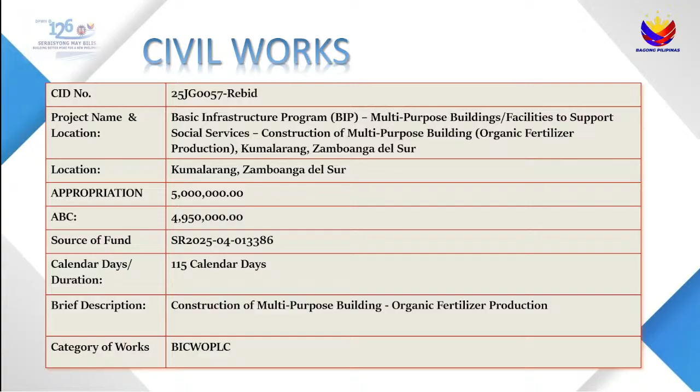Next, CID 25 JG0068, emergency project for reblocking of secondary roads, Dimataling-Tabina Road, Barangay Sumpot to Junction, Barangay Baganian section, road section ID 01168 MN. Station limit CH 1615.5 to CH 1660.5, length 90 meters, 20 blocks both lane, Tabina, Zamboanga del Sur, with ABC of 718,289 pesos and 25 centavos.

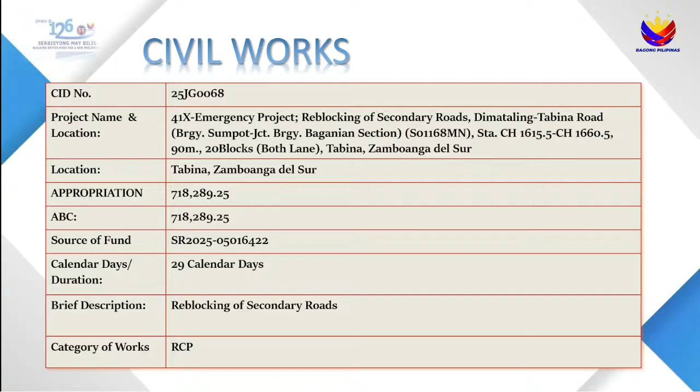Next, CID 25 JG0069, special maintenance project for reblocking of secondary roads, Dumalinao to San Pablo road, Junction Poblacion, Dumalinao to Rebokon section, road section ID 01101 MN. Station limit K1688 plus 714 to K1688 plus 738, total length 42 meters, 9 blocks and 1.5 meters both lane, Dumalinao, Zamboanga del Sur, with ABC of 476,229 pesos.

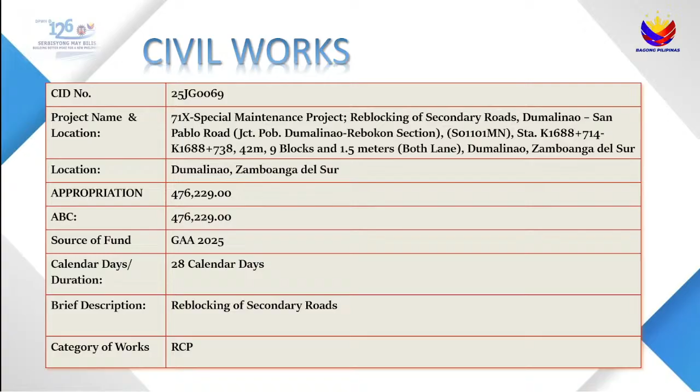And the last, CID 25 JG0071, construction of school health facilities, Kabatan National High School, Vincenzo Sagun, Zamboanga del Sur, with ABC of 3,469,580 pesos and 70 centavos. And that's all, Mr. Chair.

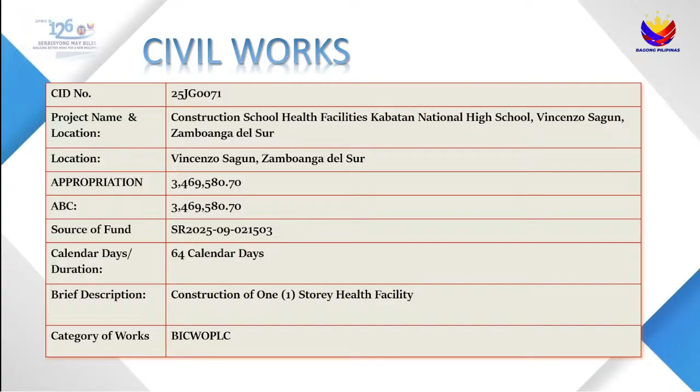Okay, thank you, Engineer Panong. Let's proceed to discuss, clarify, and explain the projects to be pre-bid today. First we will have the planning and design section, followed by the maintenance section. I call the chief of the planning and design section, Engineer Belemiba.

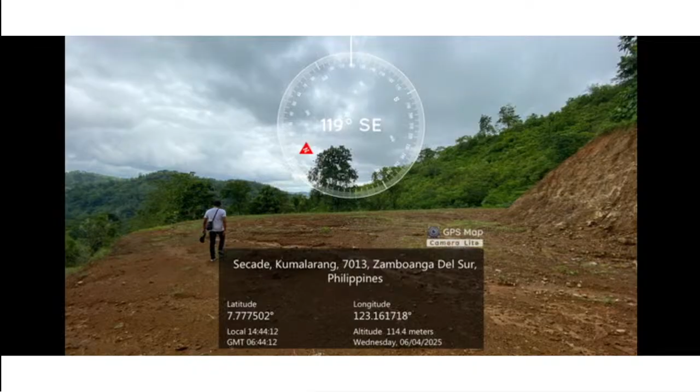Our process here will be presenting some of the plans and the site pictures, and then I will leave this to our preparer, the programmer, for the pay items involved in this project. Secretariat, ma'am, do we have any pictures and plans for 25 JG0057? So to our prospective bidders, this is the allocated site under Barangay Secade, Kumalarang. So ma'am, do we have any pictures now?

Okay, so for the information of our prospective bidders, we have an existing ongoing project from the LGU, this is the MRF project. And then ma'am, we have plans. Okay, so this is the revised plan. The allocation only fits the multi-purpose building only. So these are the plans.

Our advice to our prospective bidders: please coordinate with the planning and design section for the actual location of this project. If you have any concern about the pay items involved, you can coordinate with the planning and design section. Now, to present the following pay items and BOQs, I would like to give the table to Engineer Kathleen Villaveto.

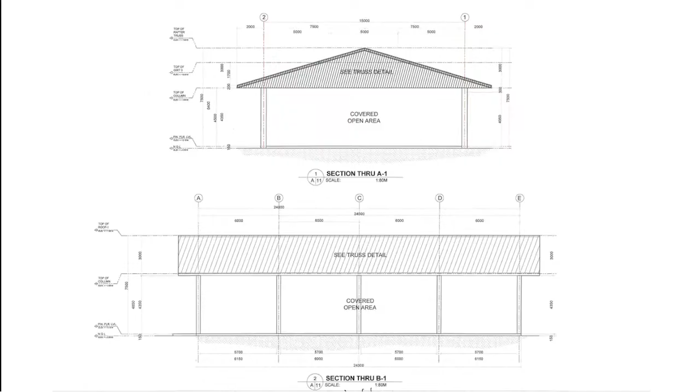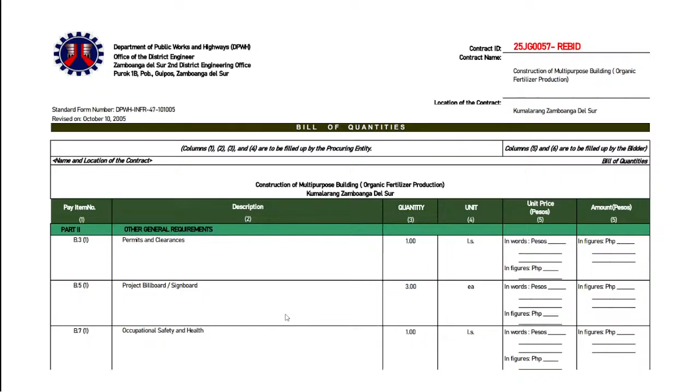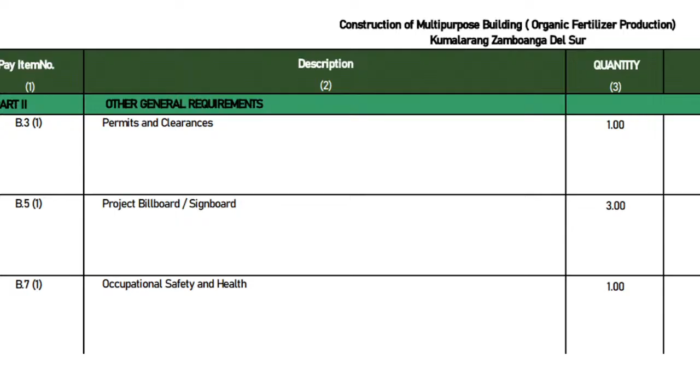Good morning to each and every one of us. For the project of construction of multi-purpose building, these are the bill of quantities per pay item. In part 2, other general requirements, you have permits and clearances, 1 lump sum; project billboard and signboard, 3 each; occupational safety and health, 1 lump sum.

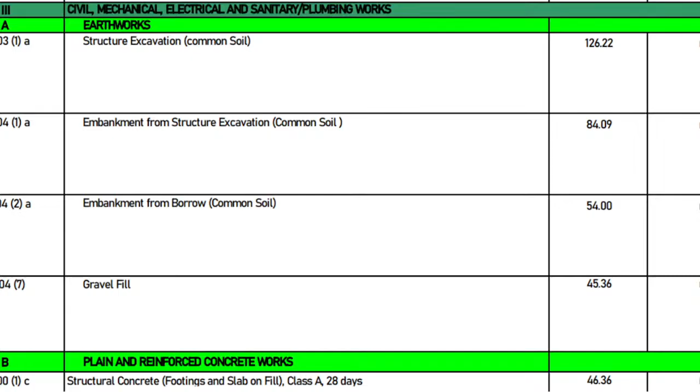Then for part 3, under civil, mechanical, electrical, and sanitary works, you have structures, part A, earthworks: structure excavation common soil, 126.22 cubic meters; embankment from structure excavation common soil, 84.09 cubic meters; embankment from borrow common soil, 54 cubic meters; gravel fill, 45.36 cubic meters.

Part B, plain and reinforced concrete works. Structural concrete footing slab on fill, Class A, 28 days, 46.36 cubic meters. Structural concrete for footing tie beam, Class A, 28 days, 8.64 cubic meters. Structural concrete columns, Class A, 28 days, 15.54 cubic meters.

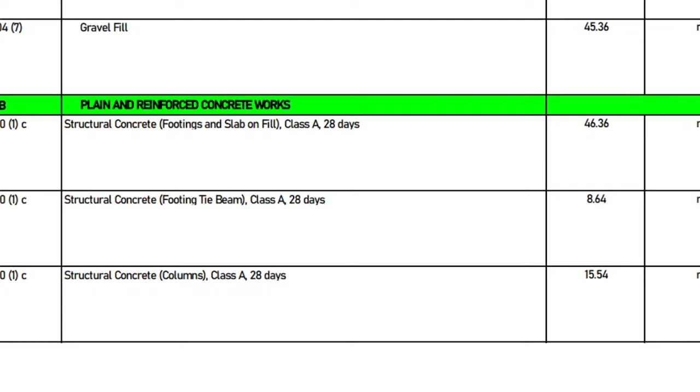Reinforcing steel, deformed grade 40, 2,068.68 kilograms. Reinforcing steel, deformed grade 60, 4,545.83 kilograms. Formworks and falseworks, 222.90 square meters. Part C, finishing and other civil works.

CHB non-load bearing, including reinforcing steel, 150 mm, 11.70 square meter. Finishing works, wall on metal frame, mini-rib, 42 square meter. Cement floor finish plain, 360 square meter. Cement plaster finish, 144.90 square meter.

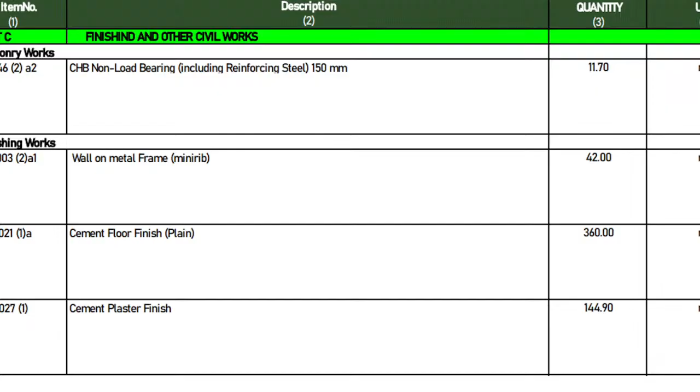For the painting works, painting masonry concrete, 121.50 square meter. Painting work steel, 688.46 square meter. Under the roof framing and roofing works, pre-painted metal sheets, corrugated long span, 560 square meter.

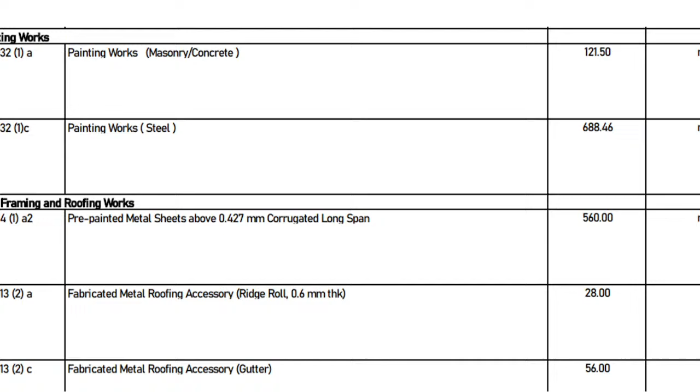Fabricated metal roofing accessory ridge roll, 28 meters. Fabricated metal roofing accessory gutter, 56 meters. Fabricated metal roofing accessory flashing, 40 meters.

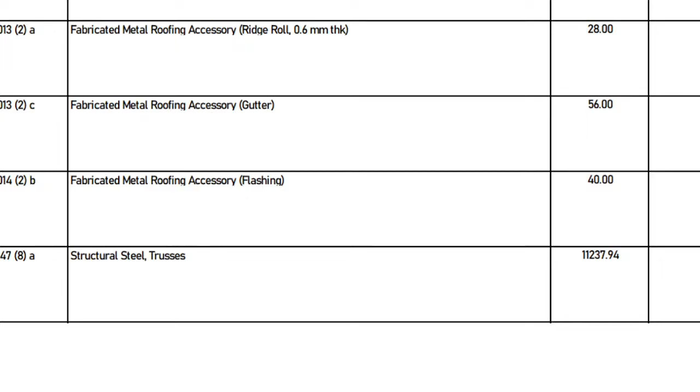Structural steel trusses, we have 11,237.94 kilograms. Structural steel purlins, 3,586.68 kilograms. Metal structure accessories, bolts and rods, 136.75 kilograms. Metal structure accessories, steel plates, 755 kilograms.

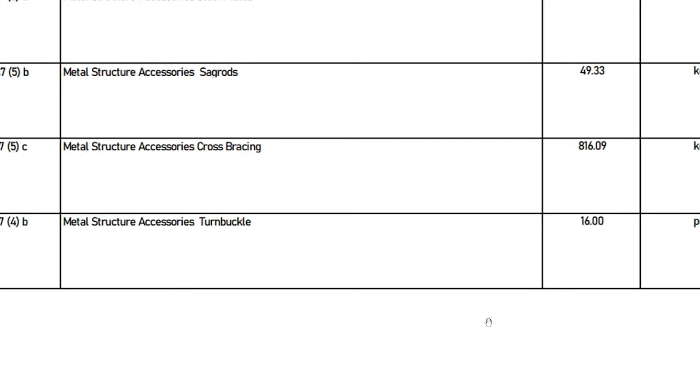Metal structure accessories, sag rods, 49.33 kilograms. Metal structure accessories, cross bracing, 816.09 kilograms. Metal structure accessories turnbuckle, we have 16 pieces.

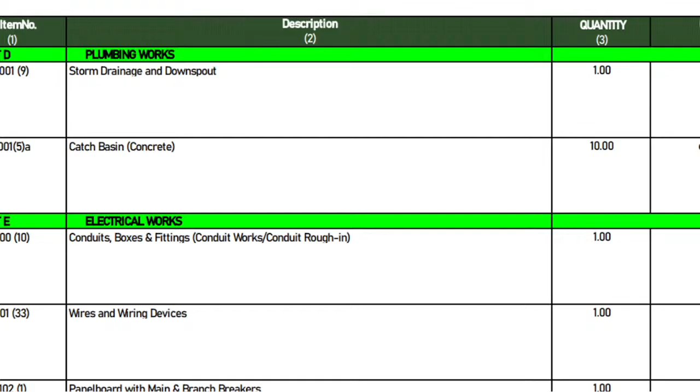Under Part D, plumbing works, storm drainage and downspout, 1 lump sum, catch basin concrete, 10 each. Electrical works: conduit boxes and fittings, 1 lump sum; wires and wiring devices, 1 lump sum; panel board with main and branch breakers, 1 lump sum; lighting fixtures, 1 lump sum.

So that's all. Okay, that is for 25GG0057, Mr. Chair.

Is there any question from the prospect bidders? If none, so let's proceed. Planning and design section for the next project.

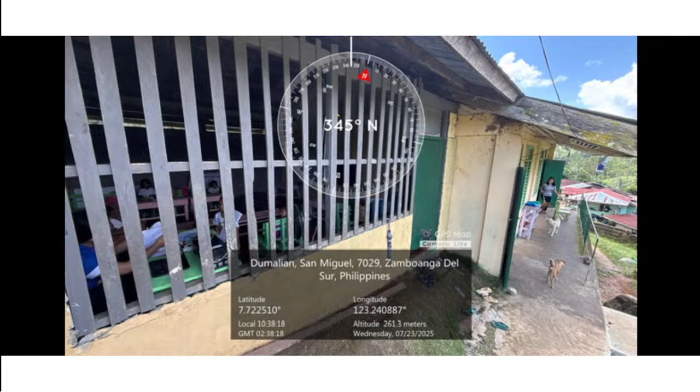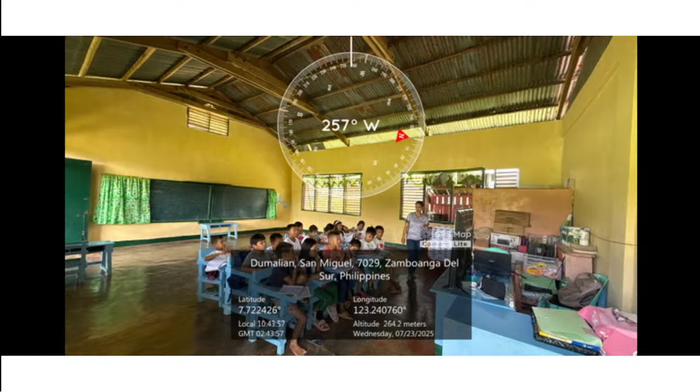Okay, our prospect bidders, these are the actual pictures from our validation. From the farther part, right side of this monitor, that is building one. Next, this is the inside of building one. So as you notice, they are using wooden trusses, which are already termite infested wooden trusses. Next, okay, this is building one.

Next one. Okay, so again to our prospect bidders, if there's any question, it will be an advantage for our prospect bidders to conduct site validation. Now, if there's any question regarding the pay items involved, then you can coordinate with the planning and design section. From the first key, these are the plans.

Now, from building 1, 2, 3, and 4. Next one, this is building 2. Next one, this is building 3. Next, and lastly is building 4.

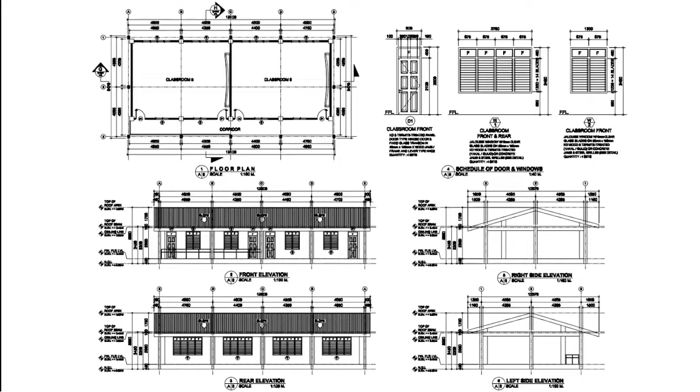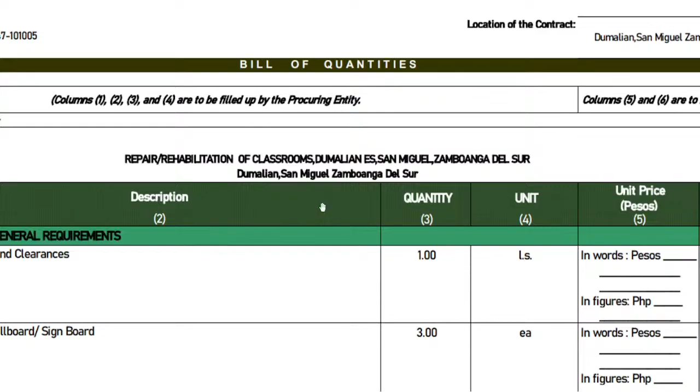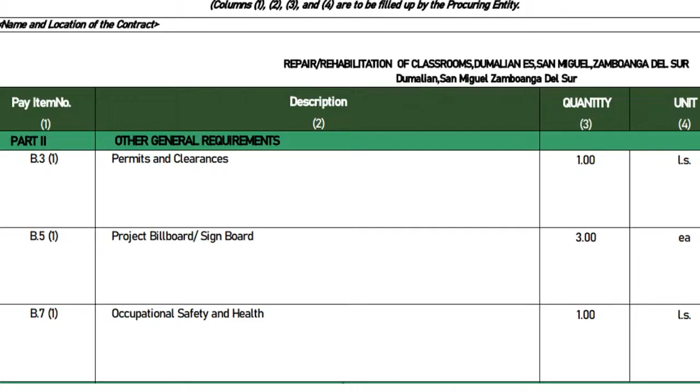Okay, so for the following pay items involved, I would like to give this again to Engineer Kevin Villabeto. So for the pay items of this contract, repair and rehabilitation of classroom, Dumalian Elementary, Zamboanga del Sur. Other general requirements: permits and clearances 1 lump sum, project billboard/signboard 3 each. Occupational safety and health, 1 lump sum.

So under Part 3, civil, mechanical, electrical, and sanitary plumbing works. Part A, earthworks: removal of structures and obstruction, 1 lump sum. Structure excavation, common soil, 52 cubic meters. Embankment from structure excavation, common soil, 36.02 cubic meters. Gravel fill, 4 cubic meters.

Part B, plain and reinforced concrete works. Structural concrete, footings and slab on fill, class A, 28 days, 10 cubic meters. Structural concrete for beams, class A, 28 days, 9.37 cubic meters. Structural concrete columns, class A, 28 days, 11.51 cubic meters. Reinforcing steel deformed grade 40, 1,792.42 kilograms.

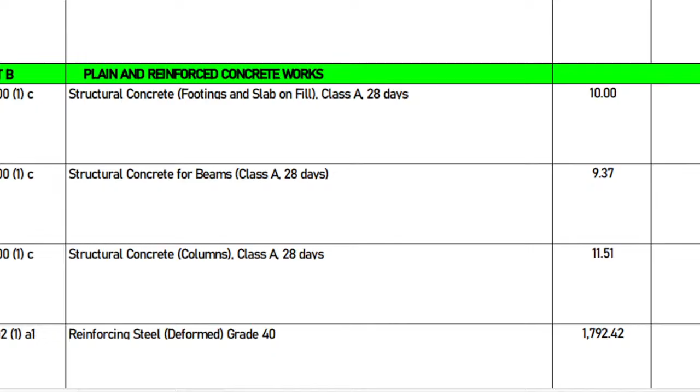Reinforcing steel deformed grade 60, 3,725.60 kilograms. Formworks and falseworks, 181.76 square meters. Under Part C, finishing and other civil works, frames, jambs, sills, heads, transoms, and mullions, 33 sets.

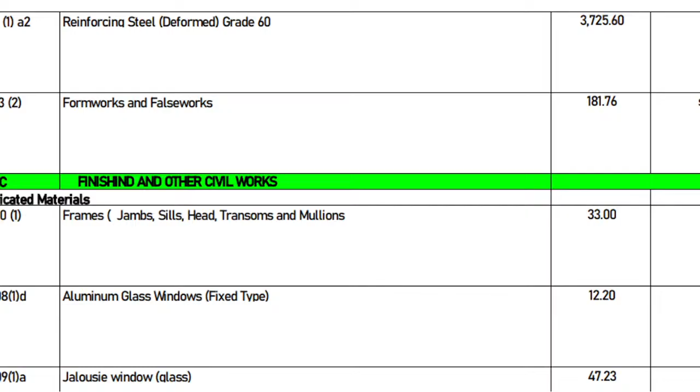Aluminum glass windows, fixed type, 12.20 square meter. Jalousie window glass, 47.23 square meter. Finishing hardware, 1 lump sum. Door wood panel, 22.68 square meters. Railing, 1 lump sum.

Then under finishing works, cement plaster finish, 93.59 square meters. Painting works for masonry and concrete, 1,319.15 square meters. Painting works for wood, 851.89 square meters. Painting works for steel, 829.83 square meters.

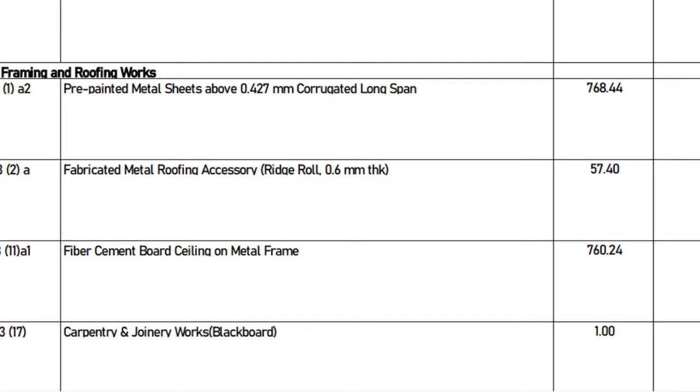Under the roof, framing and roofing works, pre-painted metal sheets, corrugated long span, 768.44 square meter. Then fabricated metal roofing accessories, ridge roll, 57.40 meters. Fiber cement board, ceiling on metal frame, 760.24 square meters. Carpentry and joinery works, board, 1 lump sum.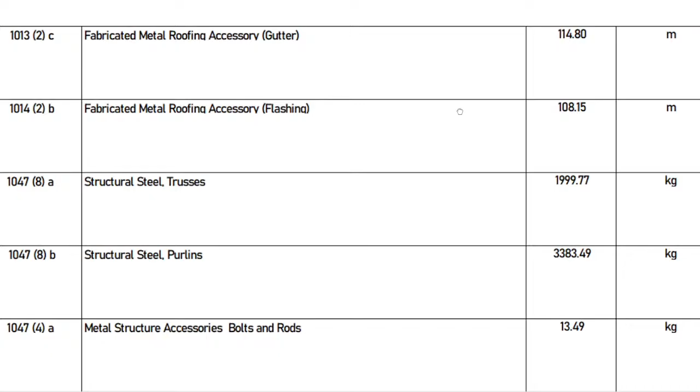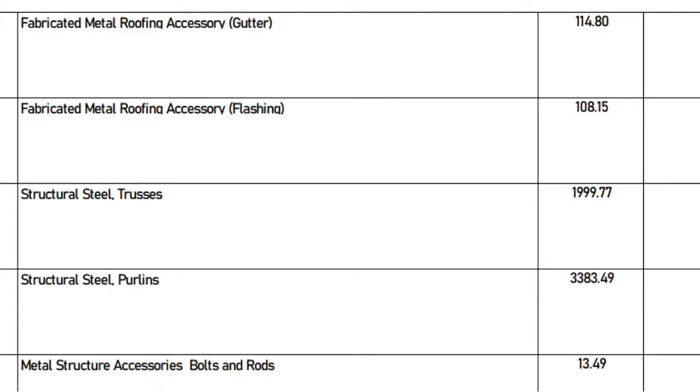Fabricated metal roofing accessories: gutter, 114.80 meters; flashing, 108.15 meters. Structural steel trusses, 1,999.77 kilograms. Structural steel purlins, 3,383.49 kilograms. Metal structure accessories: bolts and rods, 13.49 kilograms; steel plates, 225.79 kilograms; sag rods, 177.60 kilograms.

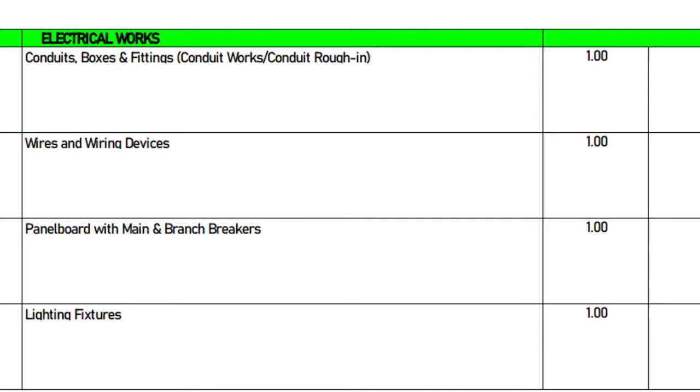Under electrical works, we have conduit, boxes and fittings, 1 lump sum. Wires and wiring devices, 1 lump sum. Panel board with main and branch breakers, 1 lump sum. Lighting fixtures, 1 lump sum. So that's all.

Thank you, Engineer Kathleen. Lastly, for 25JJ0071, this is construction of school health facilities, Tabata National High School, in Sagun, Zamboanga del Sur, amounting to 3,469,580 pesos and 70 centavos. Now for this project, I have to request approval.

So this is the proposed location of the school's health facilities. Actually, the function is a dental clinic. So following also is the perspective to give us an idea of the outcome of the building.

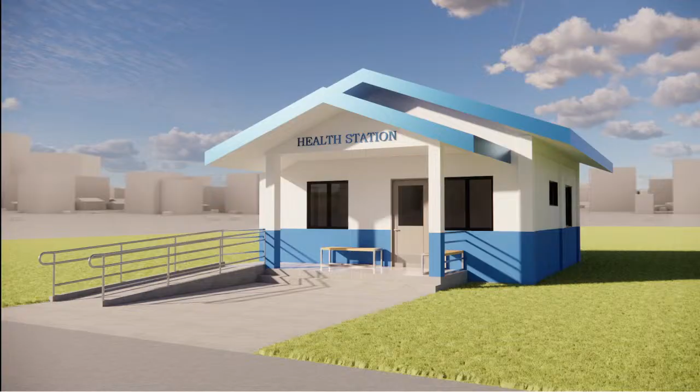To the information of our prospective bidders, the original plan submitted to us had no exit from the structure. Ma'am, can you show us the floor plan? So from the floor plan, standard design forwarded from our group chat, we noticed that there was no exit or emergency exit.

So we provided a revision to include an emergency exit for the structure, this is for PD 1096. And then we relocated our PWD toilet to areas which are accessible to the public, especially in the waiting area. So these are the plans and the elevations also.

Okay, for the presentation of pay items and quantities, I would like to call on Architect Neo Torres Diones. Ay sorry, Hiniano. Good morning, everyone. For the bill of quantities for the project, construction of one-story health facility in Vincenzo Sagun, Zamboanga del Sur.

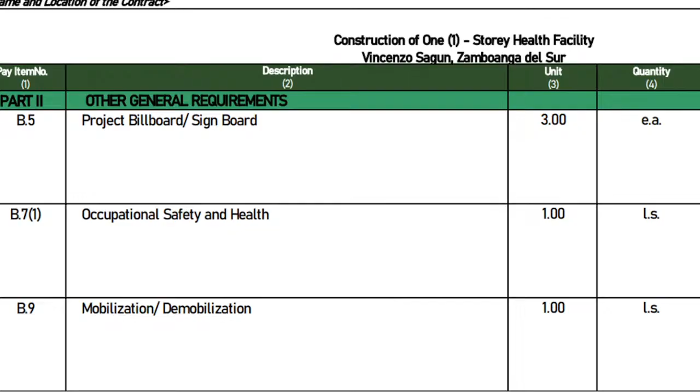For the pay item B.5, project billboard and signboard, 3 each, and B.7(1), occupational safety and health, 1 lump sum. Mobilization, 1 lump sum.

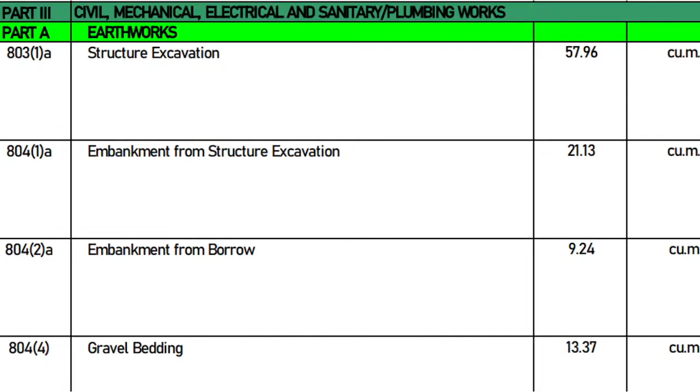For pay item 803-1A, structure excavation, 57.96 cubic meters. Embankment from structure excavation, 21.13 cubic meters. Embankment from borrow, 9.24 cubic meters. Gravel bedding, 13.37 cubic meters.

Structural concrete ready mix, class A, 28 days, 7.89 cubic meters. Structural concrete for slab on fill, class A, 28 days, 12.22 cubic meters. Structural concrete for footing tie beam, class A, 28 days, 4.20 cubic meters. Structural concrete for column, class A, 28 days, 4.41 cubic meters. Structural concrete for beam, class A, 28 days, 3.32 cubic meters.

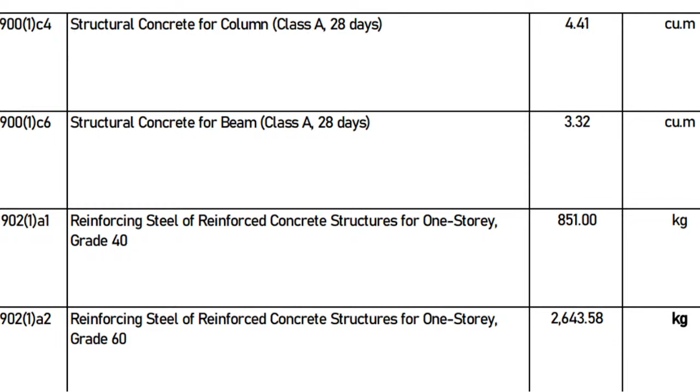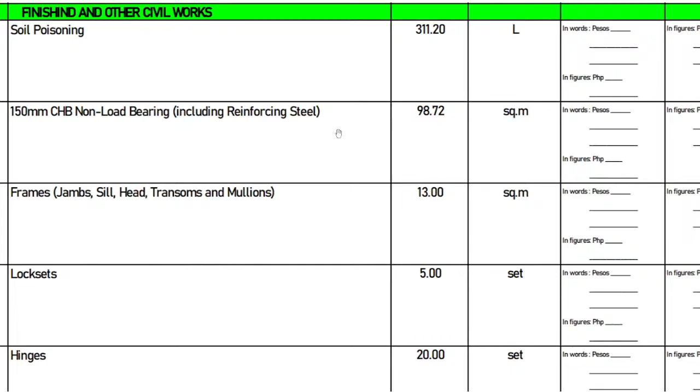For pay item 902-1A1, reinforcing steel for reinforced concrete structure, 1-story, grade 40, 851 kilograms. Reinforcing steel for reinforced concrete structures, 1-story, grade 60, 2,643.58 kilograms. For forms and falseworks, 153.81 square meters. For soil poisoning, 311.20 liters. For 150mm CHB non-load bearing including reinforcing steel, 98.72 square meters.

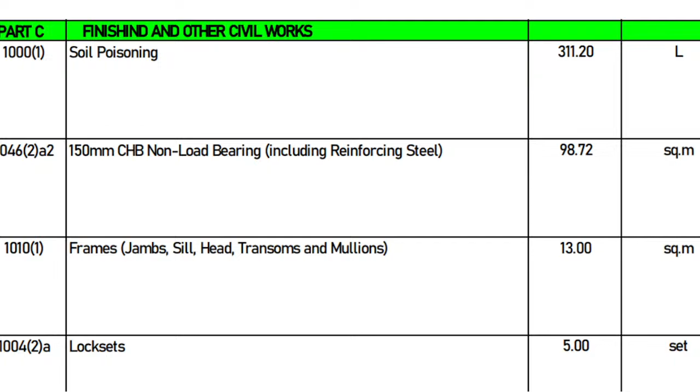Frames, jamb, sill, head, transoms and mullions, 13 square meters. Lock set, 5 sets. Hinges, 20 sets. Wooden panel door, 9.78 square meters. Aluminum glass window, sliding type, 0.81 square meters. Aluminum glass window, awning type, 10.94 square meters.

Plain cement plaster finish, 197.44 square meters. For the railings, 49.63 meters. For fiber cement board ceiling on metal frame, 96.79 square meters. For glazed tiles and trims, 65.47 square meters. Unglazed tiles, 3.24 square meters.

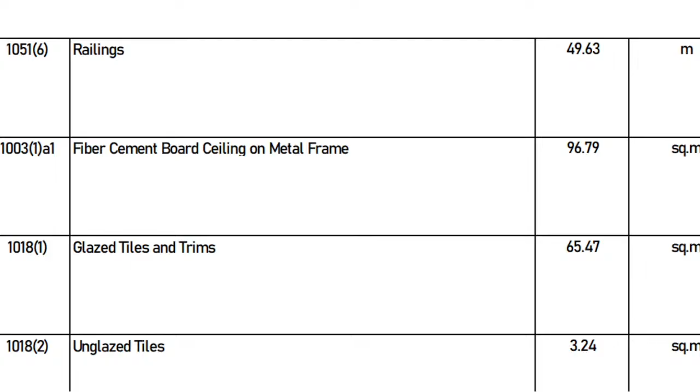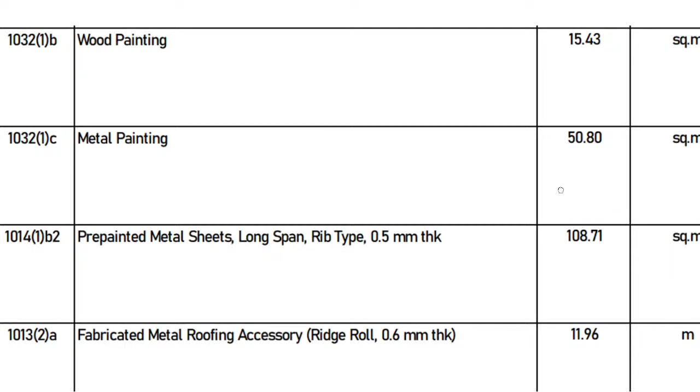For concrete painting, 197.44 square meters. For wood painting, 15.43 square meters. For metal painting, 50.80 square meters. For pre-painted metal sheets, long span, rib type, 0.5mm thickness, 108.71 square meters.

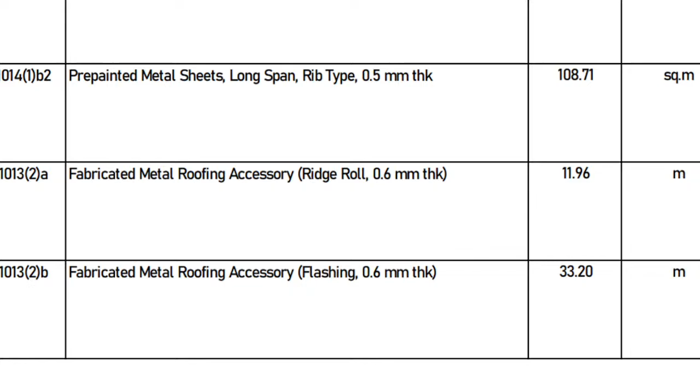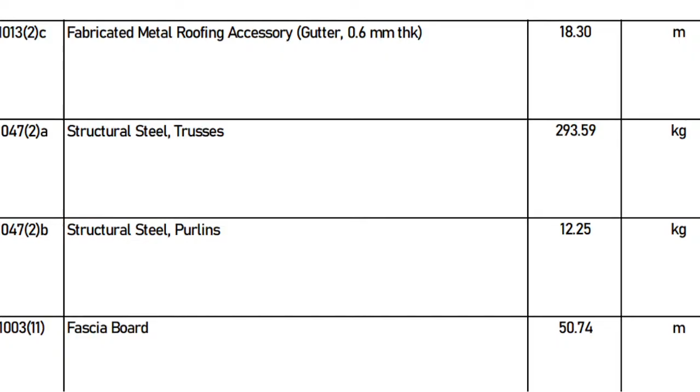For fabricated metal roofing accessory, ridge roll, 0.6mm thickness, 11.96 meters. For fabricated metal roofing accessory, flashing, 0.6mm thickness, 33.20 meters. For fabricated metal roofing accessory, gutter, 0.6mm thickness, 18.30 meters. For structural steel trusses, 293.59 kilograms. Structural steel purlins, 12.25 kilograms. And for fascia board, 50.74 meters.

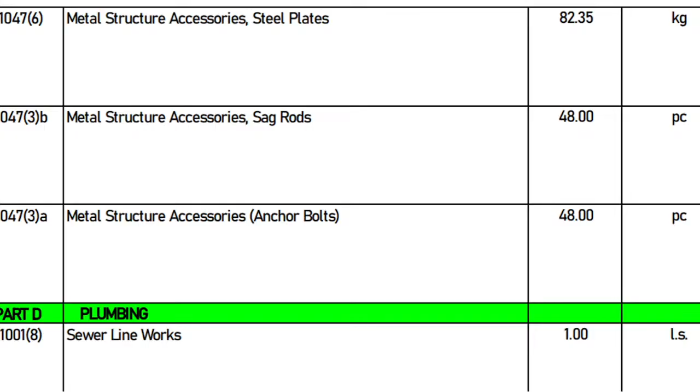For metal structure accessories, steel plate, 82.35 kilograms. For metal structure accessories, sag rods, 48 pieces. For metal structure accessories, anchor bolts, 48 pieces. For plumbing, sewer line works, 1 lump sum. And for storm drainage and downspout, 1 lump sum. Sanitary plumbing fixtures, 1 lump sum. Catch basin, 1 lump sum.

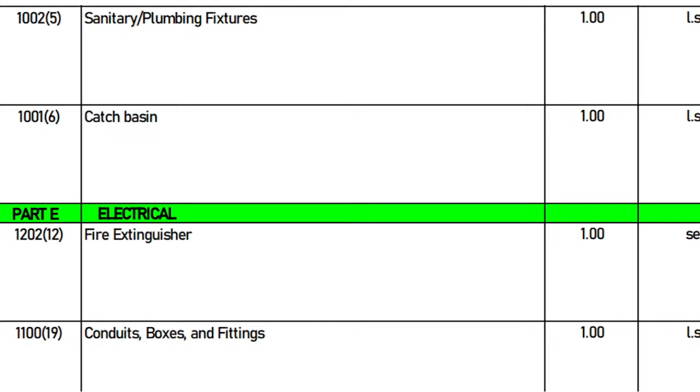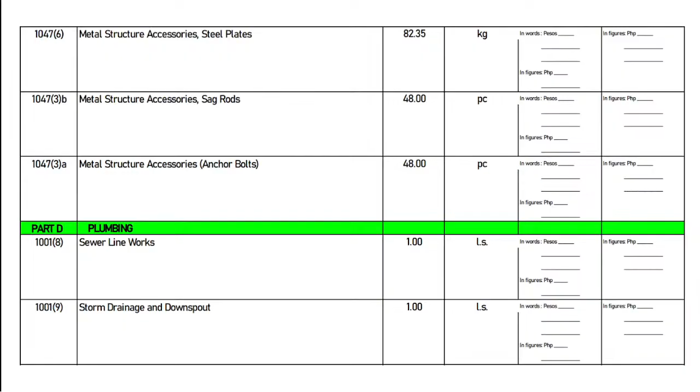And for part E, electrical, fire extinguisher, 1 set. Conduits, boxes and fittings, 1 lump sum. Wires and wiring devices, 1 lump sum. Power load center, switch gear, and panel boards, 1 lump sum. And for lighting fixtures, 1 lump sum.

Thank you, Architect Lawrence. That is all for 25, 57, 70 and 71. Thank you, Mr. Chair. Okay, thank you, planning and design section. So is there any question from the prospective bidders? If none, so let's proceed for the maintenance project.

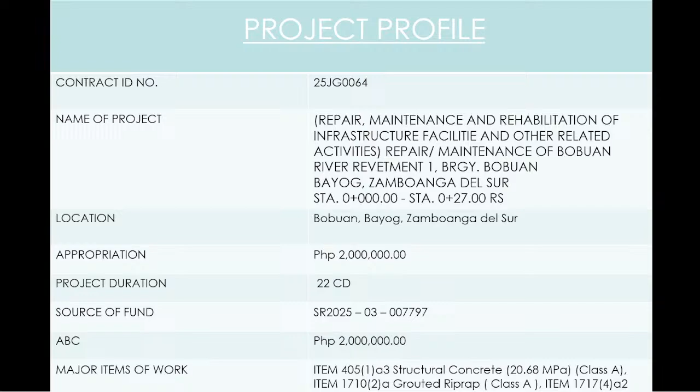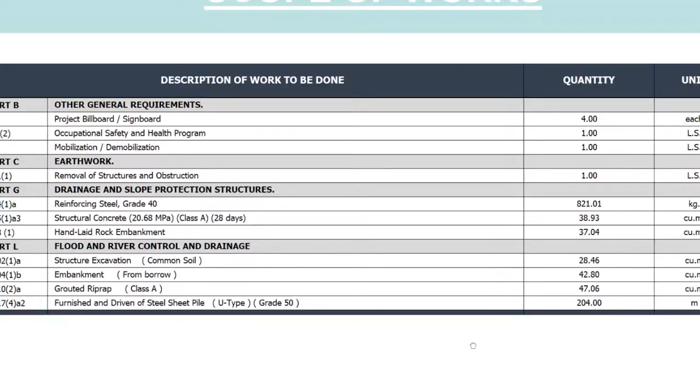This is the scope of works of our project: project billboard signboard, 4 each; occupational safety and health program, 1 lump sum; mobilization, demobilization, 1 lump sum; removal of structures and obstruction, 1 lump sum; reinforcing steel grade 40.

821.01 kilograms. Structural concrete, 20.68 MPa Class A, at 28 days, 38.93 cubic meters. Then hand-laid rock embankment, 37.04 cubic meters. Structure excavation, common soil, 28.46 cubic meters. Embankment from borrow, 42.8 cubic meters. Grouted riprap Class A, 47.06 cubic meters. And furnished and driven steel sheet piles, U-type grade 50, 204 meters.

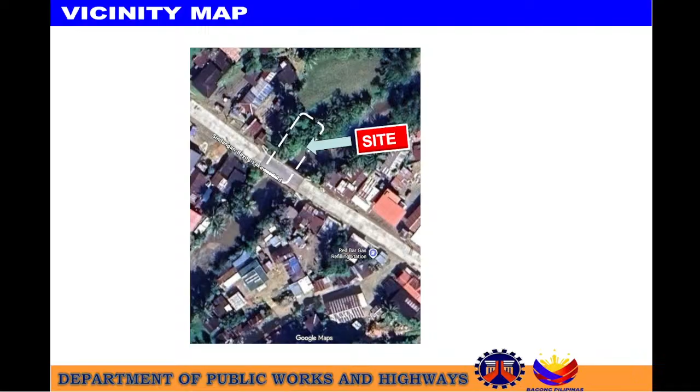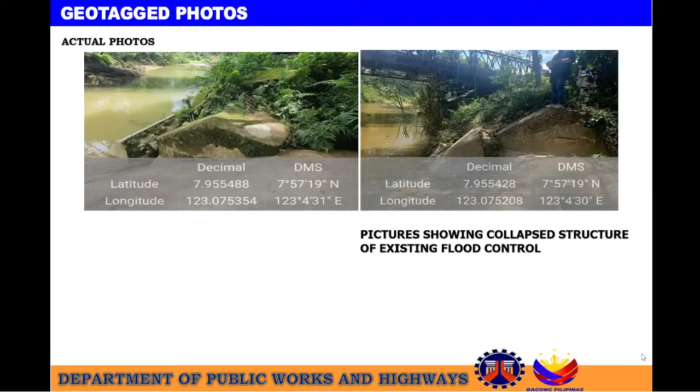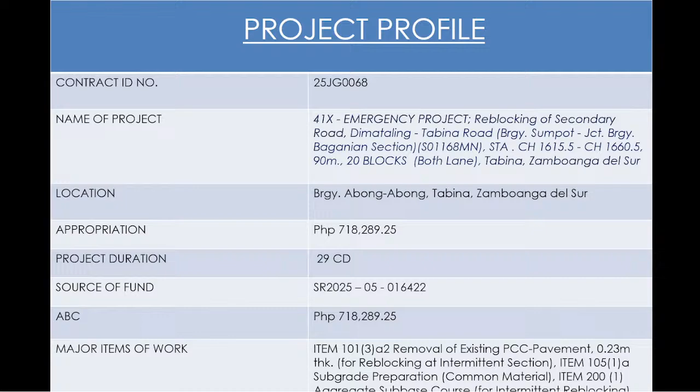Item 10132, removal of existing PCC pavement, 0.23 meter thick for reblocking. Item 105-1A, subgrade preparation, common material. Item 200(1), aggregate sub-base course.

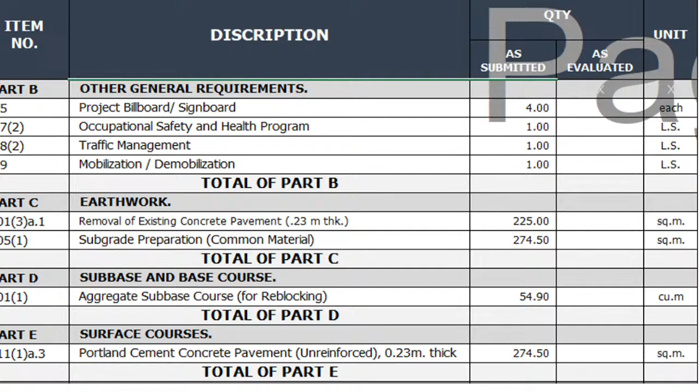These are the items of work with their corresponding codes. B.5, project billboard signboard, 4 each. B.72, occupational safety and health program, 1 lump sum. B.82, traffic management, 1 lump sum. B.9, mobilization or demobilization, 1 lump sum. 10138.1, removal of existing concrete pavement, 0.23 meter thick, 225 square meters. 1051, subgrade preparation, common materials, 274.5 square meters. 2011, aggregate sub-base course for reblocking, 54.9 cubic meters. 311(1)a.3 Portland cement concrete pavement, unreinforced, 0.23 meter thick, 274.5 square meters.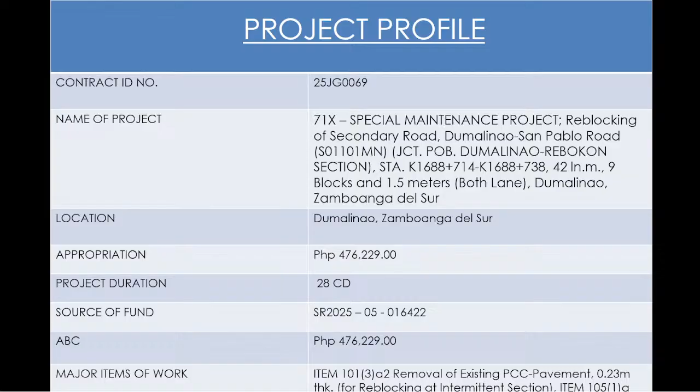ABC 476,229 pesos. The major items of work are removal of existing PCC pavement, 0.23 meter thick, same as the previous project. These are the items of work.

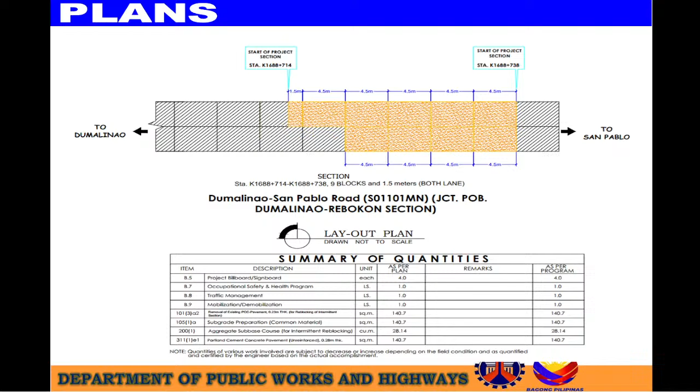This is the proposed plan for the reblocking project in Dumalinao, Zamboanga del Sur, and its road specifications. That is the end of our presentation.

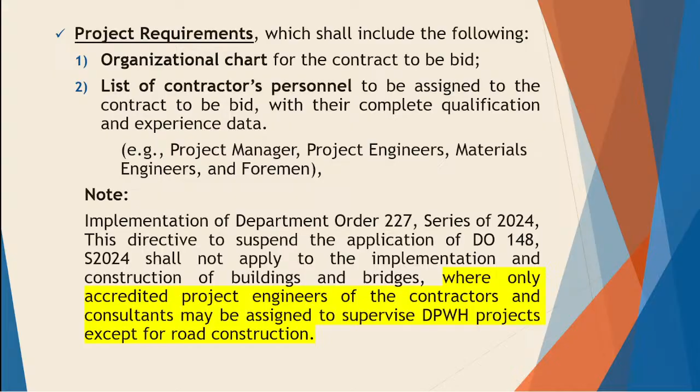List of contractors' major equipment units which are owned, leased, and or under purchase agreement, supported by proof of ownership or certification of availability of equipment from the equipment lessor or vendor for the duration of the project, as the case may be. Omnibus sworn statement in accordance with Section 54.3 of this IRR.

Section 54.3. The omnibus sworn statement executed by the bidder or its duly authorized representative shall contain the following: the signatory is the duly authorized representative of the prospective bidder and is granted full power and authority to do, execute, and perform any and all acts necessary to participate, submit the bid, and to sign and execute the ensuing contract, accompanied by the duly notarized special power of attorney, board or partnership resolution, or secretary's certificate, whichever is applicable.

It is not blacklisted or barred from bidding by the GOP or any of its agencies, offices, corporations, and LGUs, including foreign governments or foreign or international financing institutions whose blacklisting rules have been recognized by the GPPB, by itself or by relation, membership, association, affiliation, or controlling interest with another blacklisted person or entity.

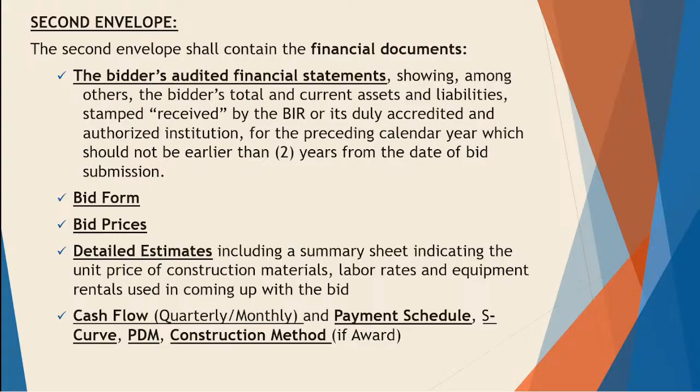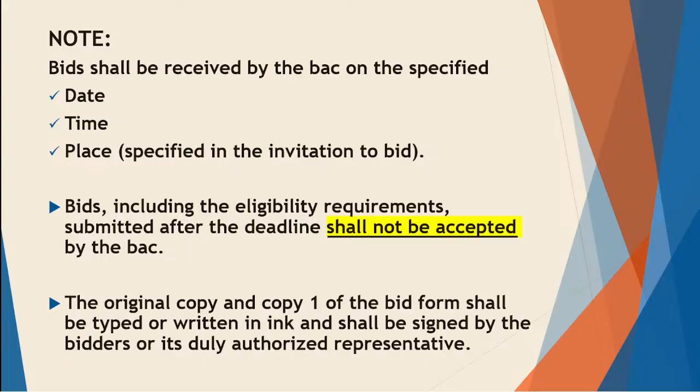Bids shall be received by the BAC on the specified date, time, and place specified in the invitation to bid. Bids, including the eligibility requirements, submitted after the deadline shall not be accepted by the BAC. The original copy and copy 1 of the bid form shall be typed or written in ink and shall be signed by the bidder or its duly authorized representative.

Unsealed or unmarked bid envelopes, or in case of electronic bid submission, bidding documents not in compressed archive folders and not password protected, shall be rejected. The BAC shall assume no responsibility for the misplacement of the contents of the improperly sealed or marked bid.

Any missing, incomplete, or patently insufficient document in the above-mentioned checklist is a ground for outright rejection of the bid. Proper tabbing and use of A4 bond paper.

Bid evaluation for the procurement of infrastructure projects. Section 59: the BAC, through its secretariat, may ask in writing the bidder for clarification of its bid. All responses to requests for clarification shall be in writing. The BAC shall evaluate the financial component of the bids to determine the lowest calculated bid using the following steps.

The BAC shall immediately conduct detailed evaluation of all bids using non-discretionary criteria, considering the completeness of the bid and arithmetical corrections. The BAC shall evaluate all bids on an equal footing to ensure fair and competitive bid comparison.

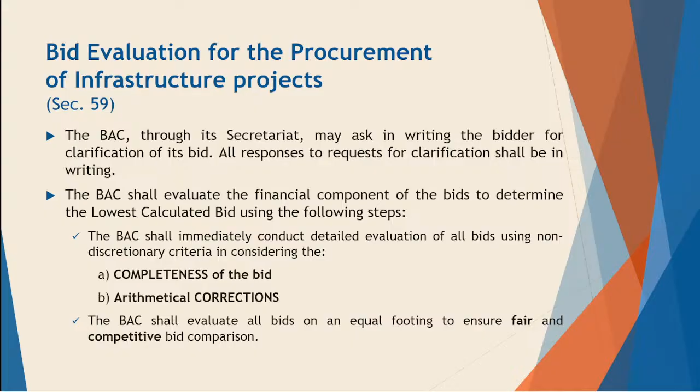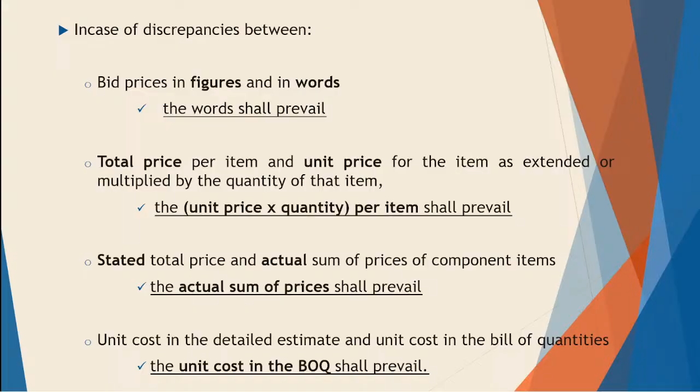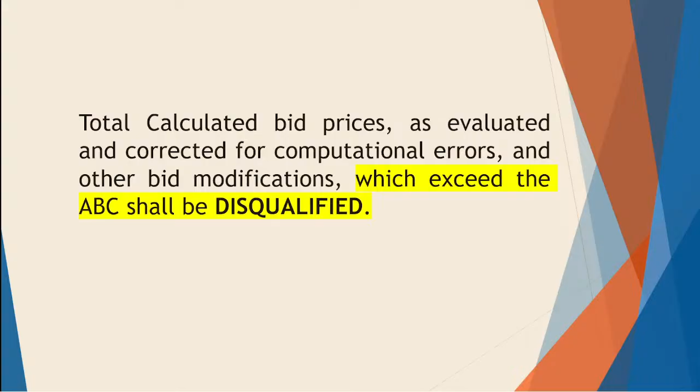In case of discrepancies between bid prices in figures and in words, the words shall prevail. For total price per item versus unit price times quantity, the unit price times quantity shall prevail. For stated total price versus the actual sum of component prices, the actual sum shall prevail. For unit cost in the detailed estimate versus unit cost in the bill of quantities, the unit cost in the bill of quantities shall prevail. Total calculated bid prices, as evaluated and corrected for computational errors and other bid modifications, which exceed the ABC shall be disqualified.

Modification and withdrawal of bids, Section 55. A bidder may modify their bid provided this is done before the deadline for receipt of bids. For manual submission, a bidder modifying their bid shall not retrieve the original bid, but shall only send another bid, equally sealed, properly identified, linked to the original bid, and marked as a modification, stamped received by the BAC. For online or electronic submission, bidders shall not retrieve their original bid, but shall send another bid, equally secured and properly identified, labeled as a modification of the one previously submitted. The time indicated when the latest bid is received shall be the official time of submission. Bids submitted after the deadline shall not be accepted.

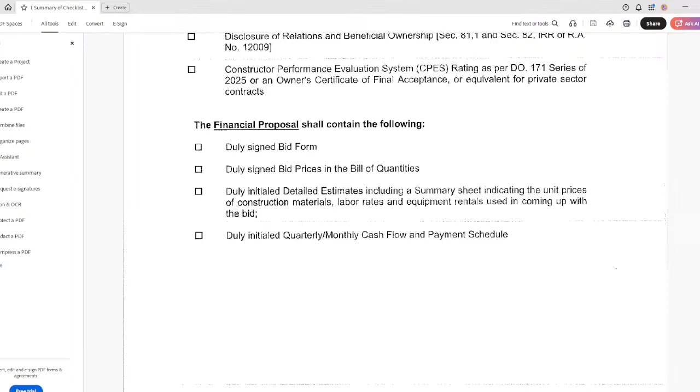Okay, thank you, Engineer, from the Technical Working Group. Is there any question or clarification from the prospective bidders regarding the system? If none, let's proceed.

So for the quality assurance concern, I call on the chief of the quality section, Engineer Abiliar. Good morning.

Department Order number 213 series of 2004 states that testing of construction materials be conducted prior to incorporation. It is hereby reiterated that all construction materials produced in the project must be subjected to quality testing prior to incorporation.

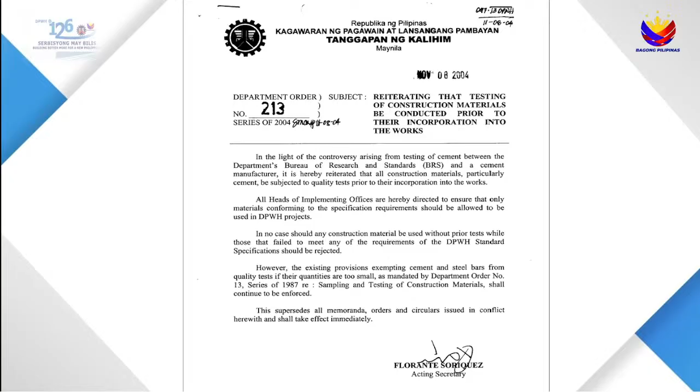Department Order number 85 series of 2019 directs all implementing offices of DPWH to optimize the utilization of their installed materials testing laboratory, and to issue a waiver as a last resort before availing the service of an accredited private laboratory.

Department Order number 49 series of 2021, schedule of minimum testing requirements governing item works, per the DPWH standard specifications for public works structures, building works, and harbors, flood control and drainage structures, and water supply systems, Volume 3, 2019 edition. This will be the guideline and reference for the minimum testing requirements of the same project.

Department Order number 218 series of 2022, amendment to Department Order number 49 series of 2021, regarding the schedule of minimum testing requirements governing item works of the DPWH standard specifications for public works structures, building works, and harbors, flood control and drainage structures, and water supply systems, Volume 3, 2019 edition.

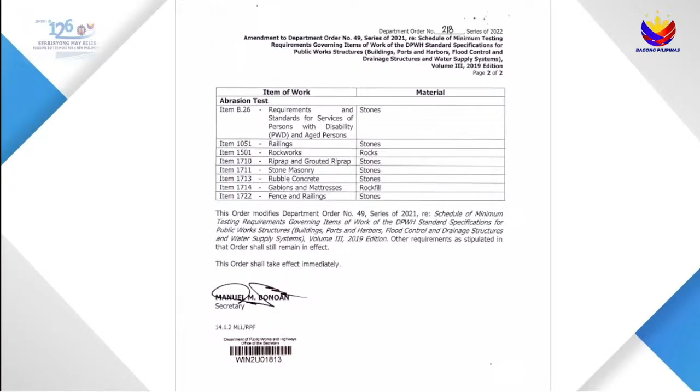The conduct of the California Bearing Ratio (CBR) and abrasion test for certain items shall not be required. Department Order number 188 series of 2022, revised schedule of fees and charges for testing of construction materials at the laboratory, will be the basis for fees and charges for all construction materials tested.

Department Order number 98 series of 2017, revised guidelines on the accreditation of contractors' and consultants' materials engineers. First, criteria for accreditation. Second, procedure for accreditation. Third, renewal and upgrading of accreditation. Fourth, classification of contractor and consultant materials engineers. And lastly, criteria for the assignment of contractor and consultant materials engineers. That's all.

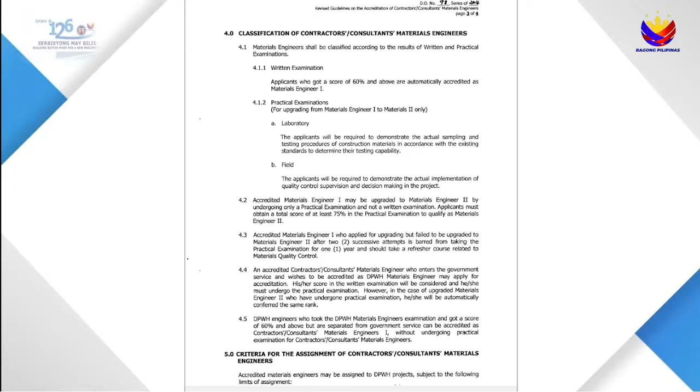Okay, thank you, Engineer Abiliar. Is there any question or clarification from the prospective bidders? If none...

For any changes to the bill of quantities, we will issue a supplemental bid bulletin, to be posted at the DPWH website at least 7 days before the opening of bids. Now for the announcement of the next schedule for the BAC second panel.